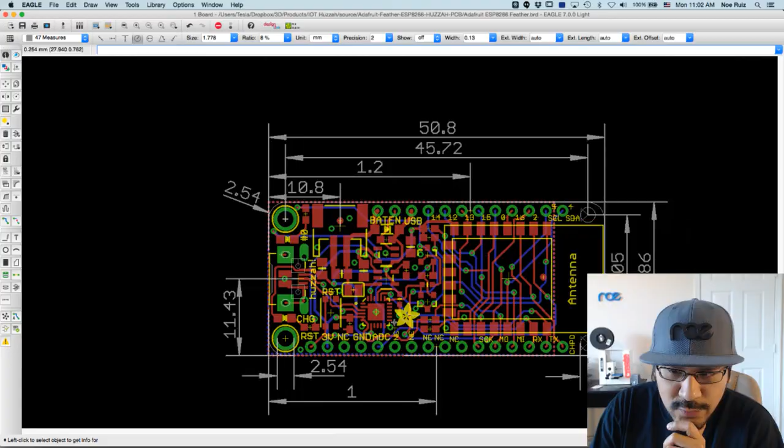What I did do is just change the dimensions from inches to millimeters. You can do that by clicking on a dimension, using the properties info tool, and then changing the unit from inches to millimeters. That's basically all I did, and I added maybe one or two things, like the radius for the fillet on the edges of the board. Everything else was nicely done for me, so that's awesome.

What I went ahead and did this morning was design the board in Fusion 360, so just a simple layout for the board, the battery, and the switch. I want to bring all those things together into one file, so I'll make a new design here. Let's call it the enclosure - this will be HUZZAH enclosure. I can spell it right.

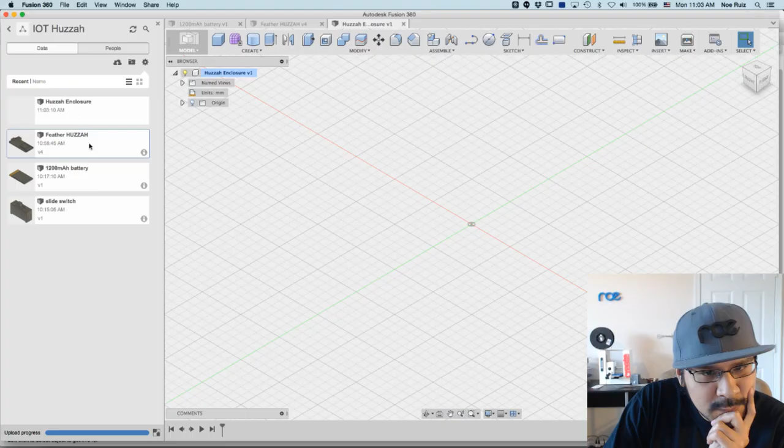Then I'll import everything in. Wait for that to finish saving in the sidebar here, in the little data panel. This is going to be an Internet of Things project that Tony came up with, and we'll talk more about what it actually does in the coming weeks or days, I think.

So let's go ahead and insert it by right-clicking and insert into current design, and that'll insert it there. I'll just hit OK for now, and then I'll bring in the battery.

And then the switch. Let's move this up a little bit, since I want standoffs on the bottom, I'm just going to move it up. Something like that. And then the switch - always important to have a switch.

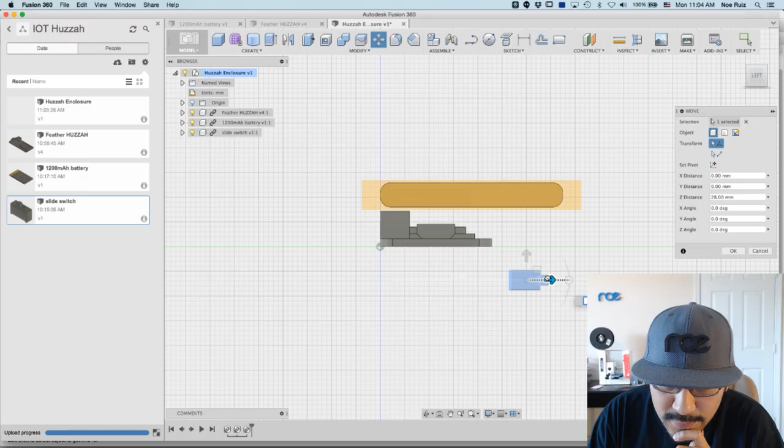I will probably put it somewhere over here, I'll orient it in the right way. Probably, clicking on the wrong thing. Probably this way, and out over here. Something like that, we're just kind of pulling it in here and there.

It looks like I have a construction line turned on, so I want to turn that off because it's kind of in my way. Notice when you import stuff, it says you can't change the visibility of it, so you actually have to go into the component and turn it off from there. Which is kind of a pain - I honestly wish you could just do it from within there, but I don't know, there's reasons. I'll just turn it off.

Hit save on that, and then when I go back, it's going to give me an error and say this component is out of date. So what I do here is right-click and say get all latest, and this will just refresh all the components to make sure everything's up to date.

So there it is. Okay, since the biggest thing is the battery, I'm going to try to make it in the middle of the feather board. So I'll just click on this and move it using the move tool, and just kind of move it here. I think that's fine, and I'll probably push it back a bit since the USB port is over there.

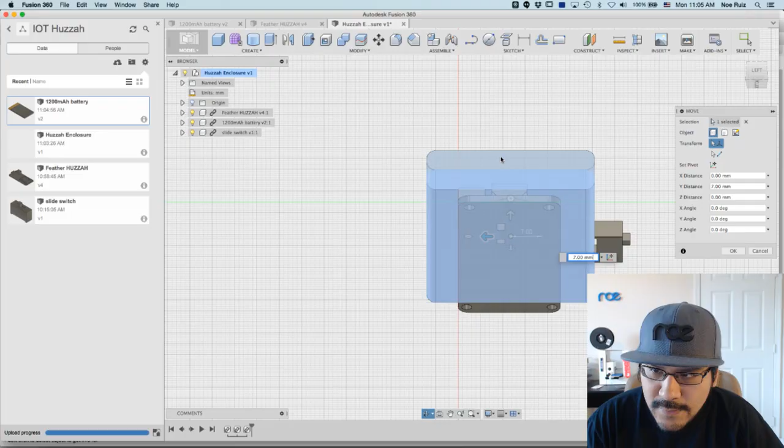I want to have it close to the edge so that I can have a hole for the USB port.

Okay, now I got to mess with the slide switch to find a good spot for it. I'm thinking let's just make it more on the edge over here. Let me go home, top, rotate. Okay, something like over here, I think that's a good spot. Let's see if I can move it up.

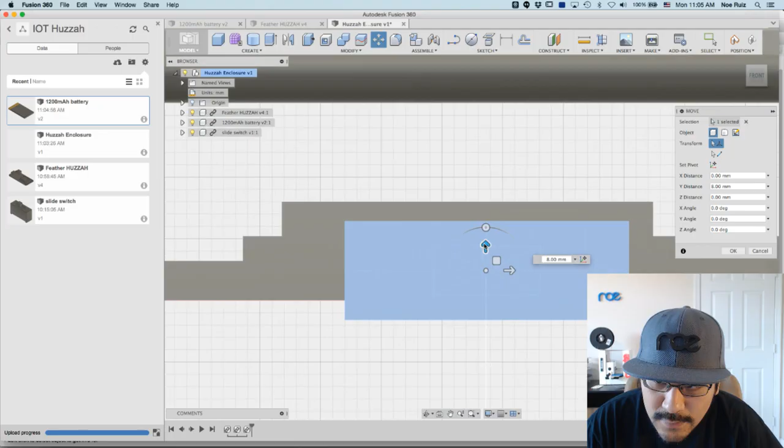See if I can get it straight on there. Sometimes you gotta zoom in more to get by 0.10 of a millimeter when you're dragging stuff.

Okay, looks okay. What I'll do now is just capture position, which saves the state, the position of all the components. Then I'll do a quick save here, say added components, and I'll start drawing out a box for the enclosure.

Yep, just making sure my screen is active.

So what I'll do next is draw the sketch out using the rectangle tool, on this flat plane here on the bottom. I'm not going to add any dimensions, just figure out a rough estimate of the shape.

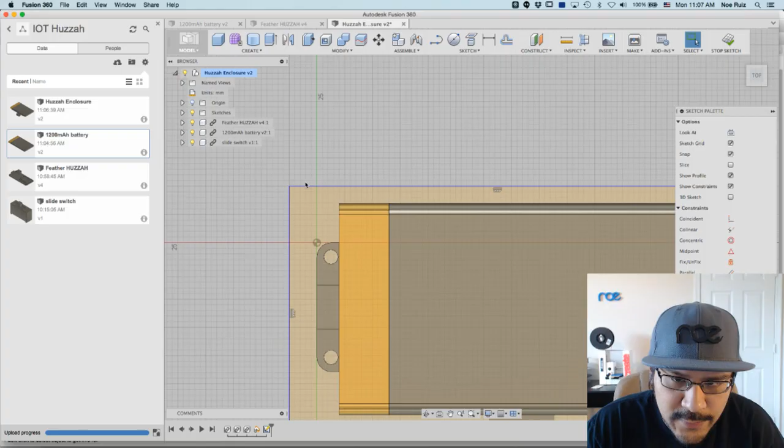So I'll just click, and you'll see if you don't tab or hit enter, you'll have some degrees of freedom. So when I move this around, I can move it without any dimensions being in the way, or restraining it, constraining it.

Okay, that's looking okay. Hit stop, and I'll start to extrude this guy. Since it's flat on there, I'll have to extrude down and up. I'll hit E on my keyboard to get the extrude command, and change the direction to two-sided so I can extrude it from this side and this side.

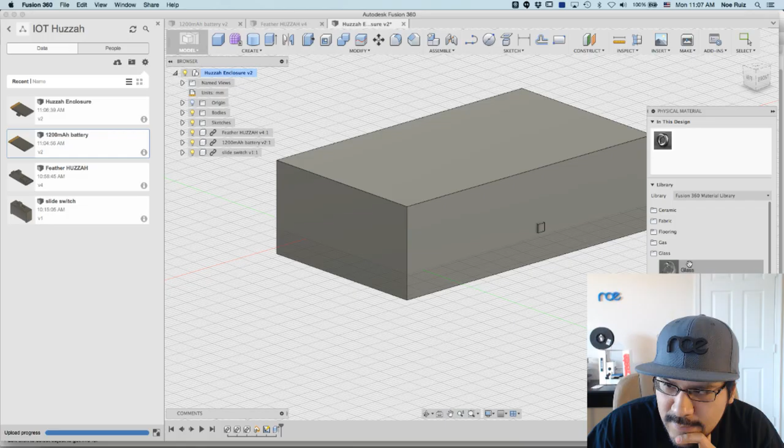Since I can modify everything, I'm just going to hit OK, because I can always double click and modify that later. I'm going to change the appearance so I can see through it. To do that, I'll right click anywhere in the canvas, click physical material, click on glass, and drag and drop glass onto there so I can see through it. I'll hit close.

Okie dokie. So what I want to do is, now I can't see through it. Let me see if I can. I want to be able to see through it while I modify this setting here. Maybe I can bring back... no, I don't think I can bring back the appearance thing. Alright, well.

I know I gotta come up a little bit more this way, because I don't need to be that thick. And I'll go ahead and add some fillets to the edges here.

A better way to do it would be to hit cancel, fillet, the hotkey is F, and I'll just drag a marquee so I can select all 4 of them. I'll do something like 3, maybe 4. Yeah, that's fine. Then I'll do some here. Oops, I'll do another fillet for the top and bottom, maybe 2. Okay.

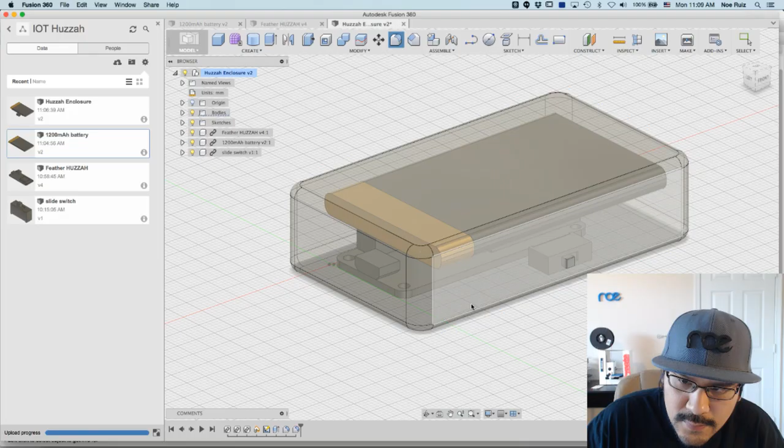So now we can start modifying the sketch here, the case, to bring it closer, because we don't need it to be so big. So I'm going to try to make it as short as possible, or as close as possible.

And when you click and drag like this, you can modify it that way, but unfortunately it's not snapping. So to get it to snap, you go into edit mode, just double click on the sketch, and then you can move it in a bit more.

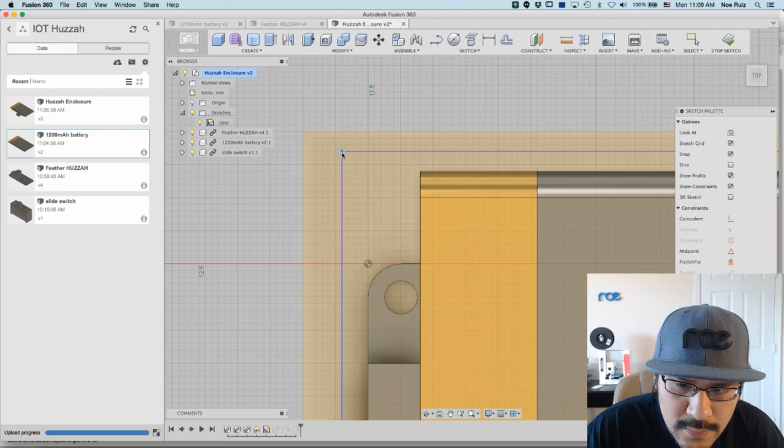Maybe over here, and then over here a bit.

And what I'm not accounting for yet is the thickness of the actual enclosure. So what I'll do now is cut it in half and then create a shell on both sides, so I can get a better idea of the thickness, to accommodate for the thickness of the enclosure.

So to do that, I'll need to get the middle. I need to make a construction plane to get in the middle of this, because I want to cut it exactly in half. So there's a tool called midplane, and when you select 2 surfaces, it'll figure out what the middle plane of that is and create a construction plane.

So I'll click on the top here and the bottom, and it makes it there. So I can use this as a reference to cut stuff.

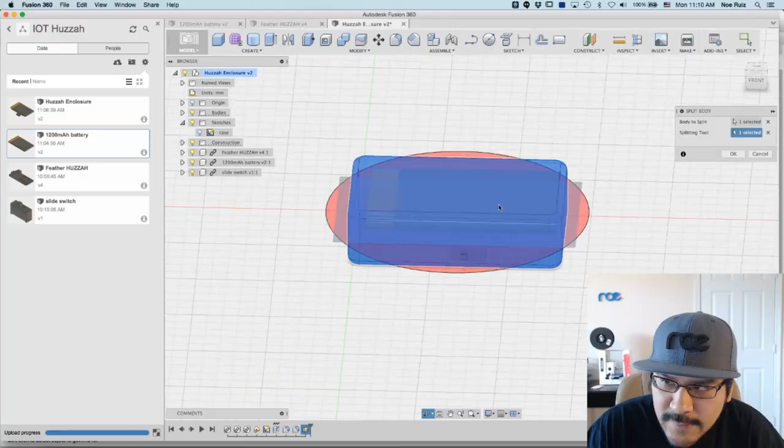So to cut stuff, I can use the split body function under modify. I'll click on that, then switch from body to split to the splitting tool, and click on that mid plane that we made. It gives you a little example of it, and it just cuts the body, not all the components. So hit OK.

Alright, so that's split, and if I go to the bodies, you see I have two bodies now. This one's bottom, this one's top.

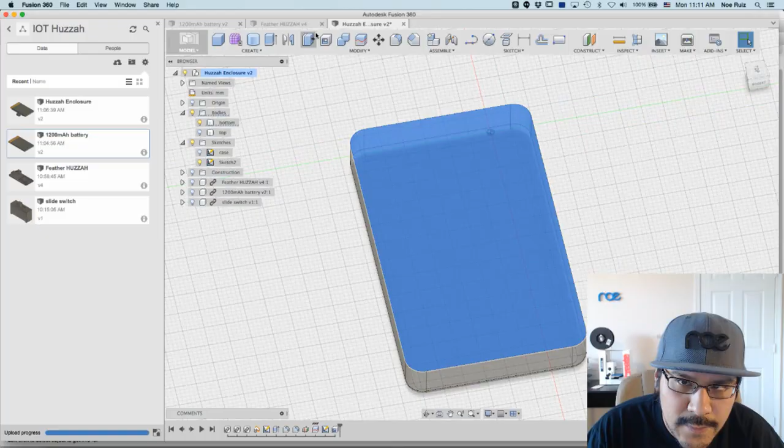Or not a sketch, I'll make a shell. I'll click on the shell button and set it to 1.4 millimeters, and I'll do the same thing for this guy here. Shell 1.4, hit OK.

Alright, so now we have two shelled enclosure things, cases. Now I'm going to bring back the components just by shift selecting them in the browser and then showing them. Let's take a look and see if anything is intersecting with it. I think it's pretty fine.

To get a better look inside, we can do a cross section. Under inspect, there's a tool called section analysis. You just click on a surface, and then you can drag the manipulator around to get a cross section of the whole assembly. So you can see I don't have anything too bad, nothing that looks like it's intersecting.

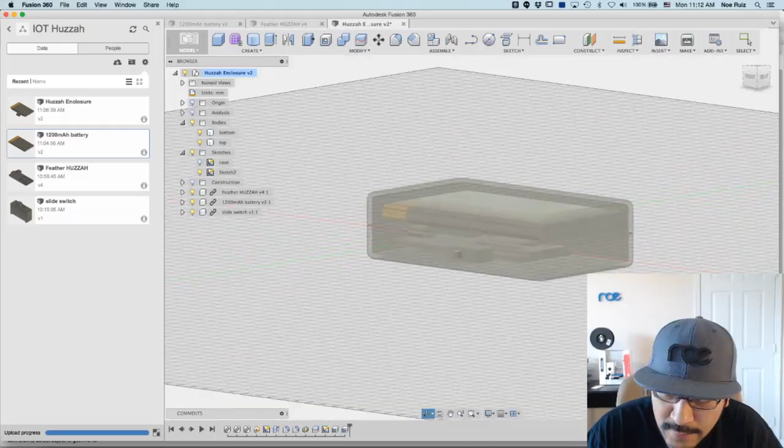So to do that, I'll do another mid construction plane. I'll go to mid plane, click on that guy and that one, and it's giving me a warning saying hey, you need to turn on your folder because you hid it. So there you go.

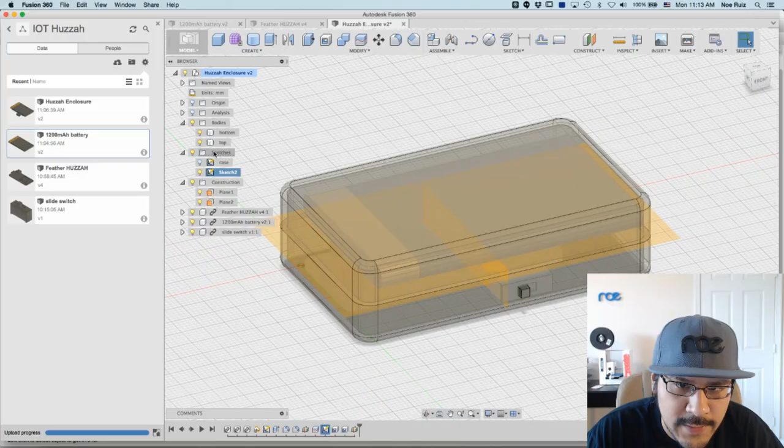So let's say I wanted to get the slide switch right in the middle, I can reference that now. So let me hide a couple things. I'll hide the sketch here. Wait, no, what sketch is this? Oh, this is some new sketch that was made for some reason, like when I was clicking around. Delete that, I don't need it. And this plane, I can hide that.

What I'll do is click on the slide switch, hit the move tool, and then try to line it up as best as I can here. See if I can get closer. Maybe 3.5. Yeah, looks pretty good. Alright.

Pretty close. Now what I want to do is I kind of want to have this recessed inside, so again I'll move it inwards. Click on slide switch, hit move, bring it in. I want to have it protrude just a teeny bit. Maybe like that much is fine.

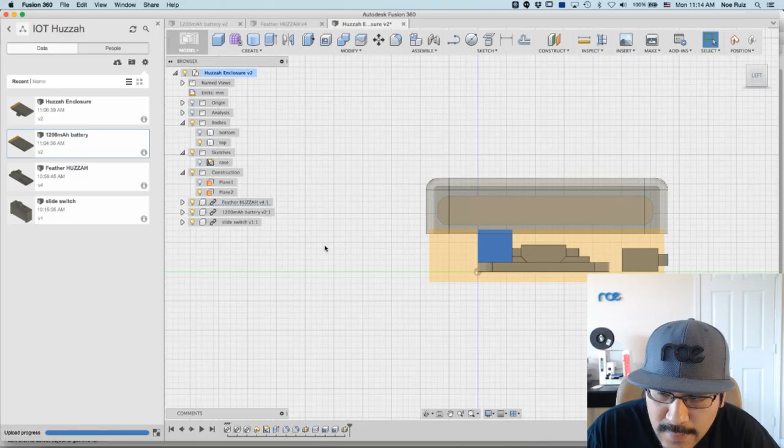Okay, so I got my components just about where I want, and this is important to have. See this big block here? That one, this guy here is the JST port. It's always important to have a little bit of extra room here, because that's where the battery, the JST port for the battery is going to be. So I have enough room for it, I think, and have enough edges. Yeah, I have enough wriggle room and stuff, so I don't want it to be too tight. I think it's pretty good.

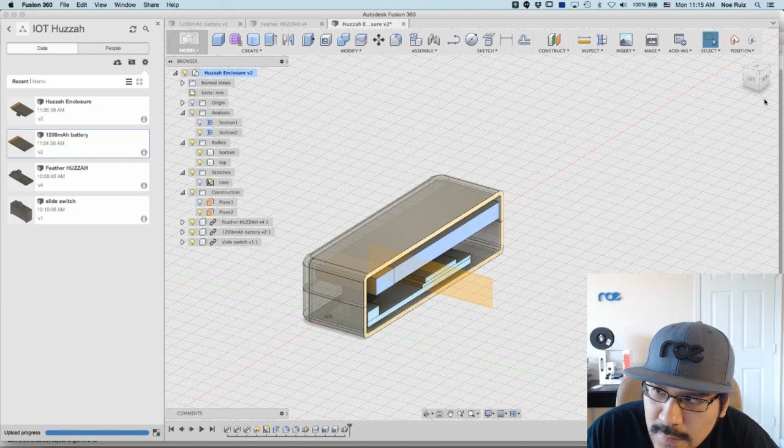Now let's take a look at another section. Let's make a new one over here. Yeah, that looks good. I want to see how close I am on the USB port. Looks pretty good. I don't want it to be right up against it, because then I'll run into some issues when I make these standoffs.

But yeah, I think it's good. I'm not sure what the distance is from here to there. I think it's like 2 or so, we'll see in a minute. Okay, and then I'll turn this off. Let's do a quick save. Need case.

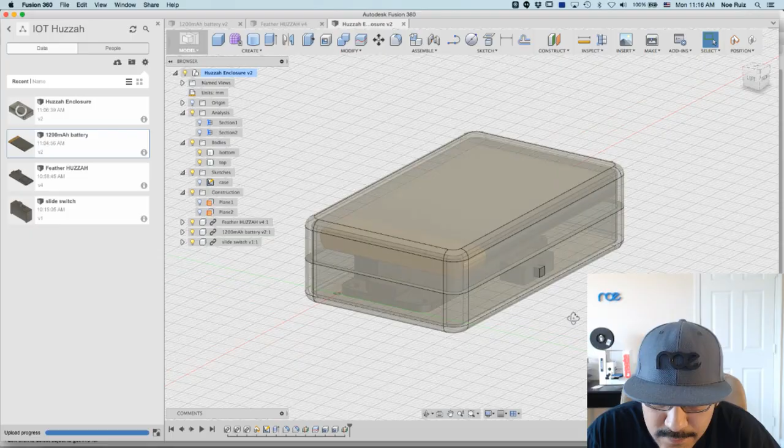Now the next thing I want to do is I can probably start making some standoffs for this guy. I don't want to use any screws in this, so I'm just going to make standoffs with pegs. To do that I will hide these guys here, and then let me capture position real quick. Okay, so capture the position right there, and I'm going to make a sketch on top of this surface here, on the bottom of the feather, so I can make those standoffs.

What I'll do is click on the circle tool, click on that guy, it'll project it for me, and when I hover in the center of a circle, it'll give me a little circle saying that's the center. So I'll make a 6mm standoff there, and here as well. Just hit C to get the circle tool, 6, enter, and I'll do the same for these two.

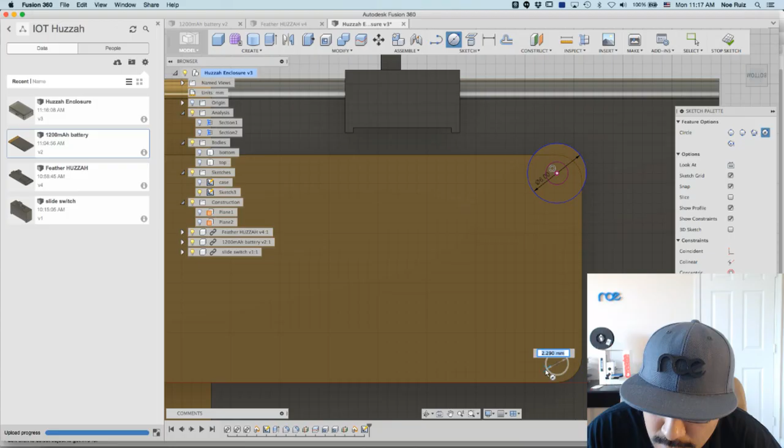Now I'll have to see how it cuts that right there. When I hover over, if I try to extrude, I'll have to extrude both of these guys. To avoid that, I can just select these guys here, and then hit X to make it a construction plane.

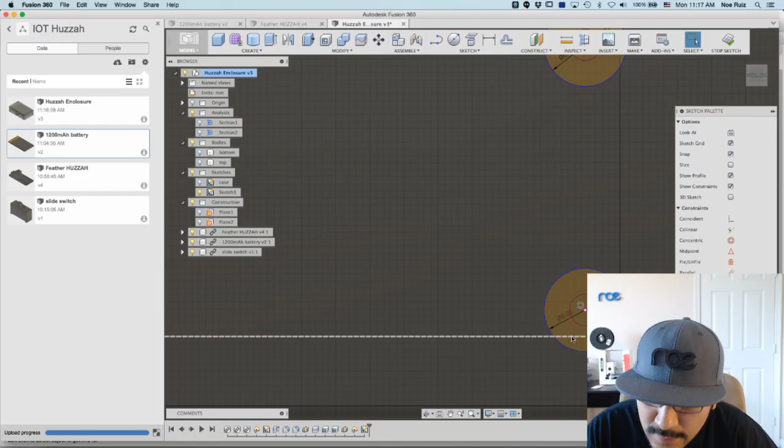These guys over here too. So now when I make it a construction plane, it's still there, but it's not intersecting my lines here, intersecting my sketches, my circle sketches, and probably over here too. They're dotted lines to give you the indicator that, hey, this is a construction line.

Okay, cool. And these are already here, so I can select these guys to be like the pegs and stuff. What I'll do here is actually offset it a bit so that they're not exactly the same size, and I'll just put like -0.1, and then I'll make a construction plane too, so that I don't have to worry about zooming in all the way and selecting it.

So I'll do the same thing, offset here. I like how the offset remembers the last value, so I don't have to put it in all the time. I think it's O on my keyboard. O.

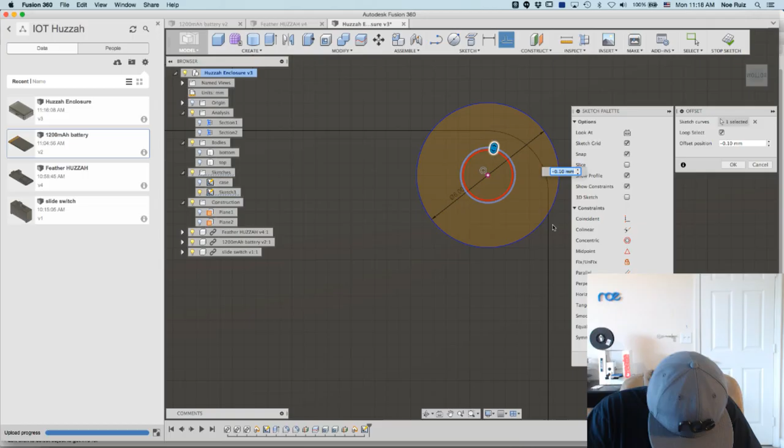Click on that. X. That's up closer, click on that. And then X. Alright, I think that's all good.

Yep, it's looking good. Okay, I'll hit stop sketch now, and I will rename the sketch to Feather Standoffs, so I know later. I'll go ahead and select these. Is it eight things? Okay. And then I'll start extruding them downwards.

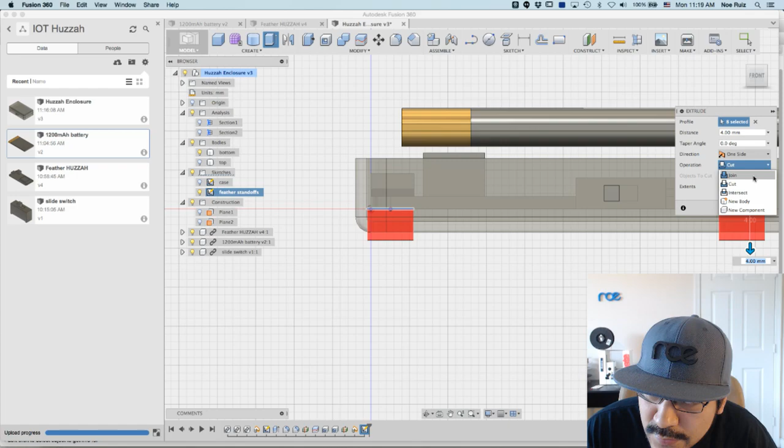And then I'll bring back the bottom case, and change the operation to join. What I'll do is, let me hide the battery so I can look inside the case. Now if I click extents and go to dynamic, and click on the bottom surface of the case like that, it'll just go to it, and that's great because then if I ever update the thickness or height of the enclosure, it'll remember to update that.

And now what I can do is, now that I have standoffs, I need to extrude those pegs up a bit. So I'll hide the feather for a second, bring back the sketch, hit E on my keyboard, and extrude these guys out. I'll probably make it like 2mm, so it's just a little bit over the 1.6 thickness of the board.

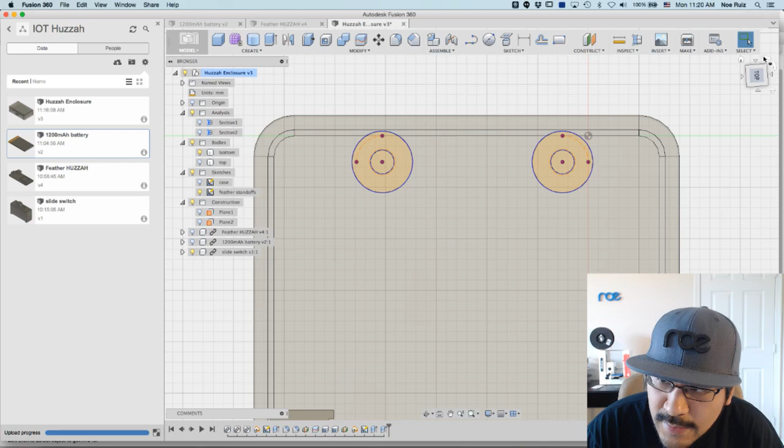Okay, cool. And again, they're offset a little bit from the mounting hole, so that if there's any expansion of the PLA when it's printing, it'll match up nicely. So I can hide that now.

What I'm noticing here is the clearance for the edge of the board here to the edge of the slide switch.

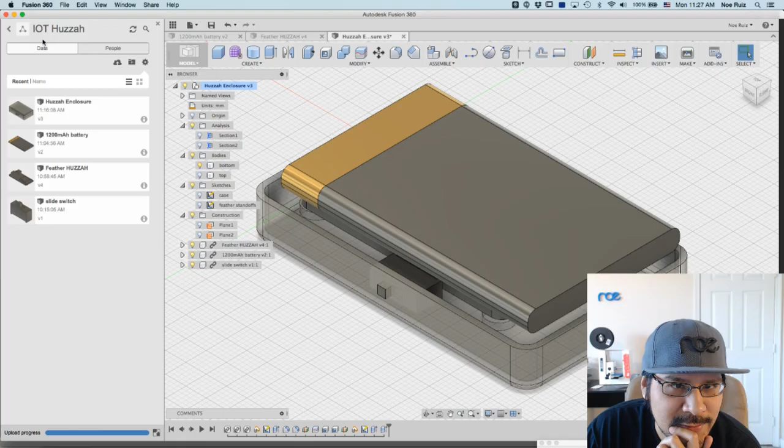The last thing we did was we made some standoffs for the Feather board. And I guess we can continue on now.

It's pretty low to the ground, it's like low riding. But, you know, there really aren't any components on the bottom. It's nice and flat, so I think the distance is fine. It's just a teeny bit, so it'll be nice and thin, if anything.

So, okay, let's move on to making a hole for the USB port. To do that, I'm just going to project a sketch over here on that guy. So I'll just click on my rectangle tool and just click on that edge there. And then I'll probably just draw a line here, a little.

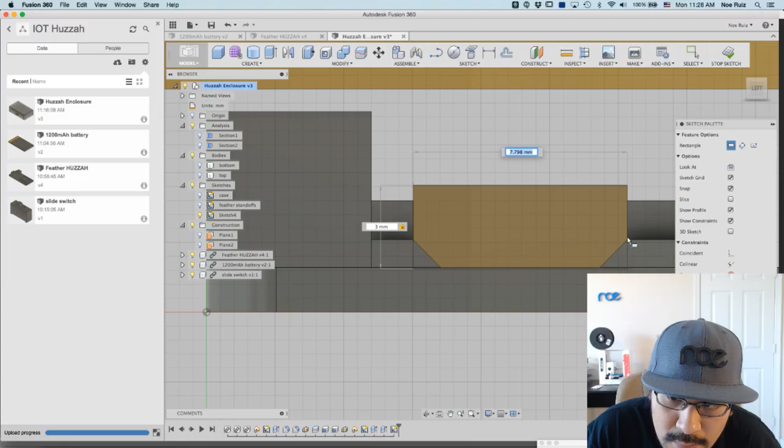What's the, I think 3? Yeah. 3 or 2.8? 2.8. Oh, 2.9. 3. Wow.

Let me close that out. What I'm trying to do is just get a standard rectangle. And for whatever reason it was not matching up, but now it is. Okay.

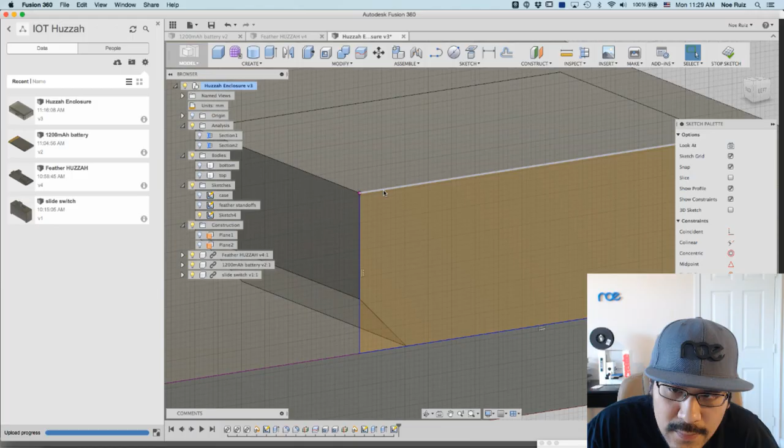Cool. And then I can do an offset here, which will be, oh wow, it's not selecting that up there. I'm having a little problem here. That's fine. When I made the thing, I must have gotten confused or something. So if I try to do an offset, you'll see it doesn't make a complete loop, even though the loop select is on. I've had this happen maybe once or twice, and I forget how I alleviated it. So I'm going to just try it again.

If I offset this guy, it'll have that bottom corner here, because that's how the USB port is. But maybe that's fine, I'll do 0.5. Hit stop sketch, and then I'll use this to cut a hole through the bottom.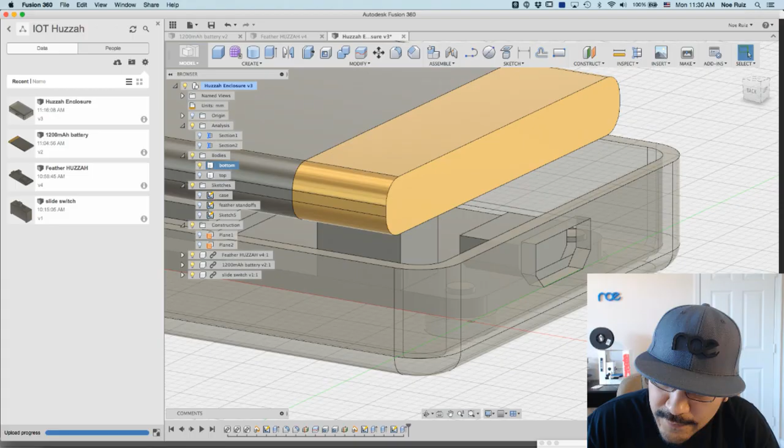So let's go ahead and select these two. Hit extrude and just pull it out. Bring back the bottom, and I'll change the distance from distance to 2, the extents. I'll hit OK, so that way if I ever increase it, yeah, I think that'll be fine.

Cool. Okay, now I need a hole for the switch, the slide switch. And to do that, it's pretty much the same thing. So I'll hide this here, and what I'm going to do is make 2 projections here. So I'm going to project that.

I think that's already been projected for me, this line here, but if not, I'll select it here like that. Okay, so what I'll do, let me go back in. Let me start naming these guys real quick. This is USB cut, this is switch cut.

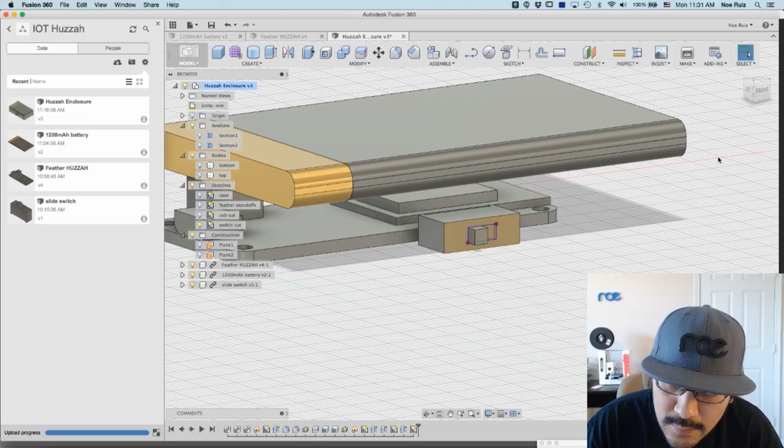Okay, I want to make an offset here. So I'll go into edit mode, click on the offset button, offset it by 0.2 on the outside, and this one, this is the same thing.

It's doing it again, why? Now let me click this way. No, I can't delete it. Okay, let me try to draw that again. Being all weird now. That's super weird.

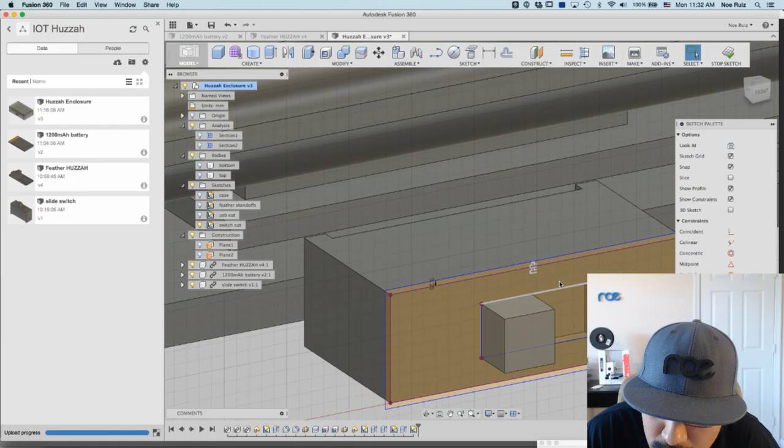We're just going to leave it, and then I'll create an offset after the fact. It's a mucky way to do it, but oh well.

And what I like to do though is probably make another offset here for a little guard thing. I'll show you what I mean here in a minute. What it'll do is it'll just be like a little holder for the slide switch. It's not just the edge of the case that's holding it in place, it'll actually be this little thing here. So I'll put 1.2, because that's the thickness I want it to be, with the 0.2 being that 0.2 offset that we had. So okay, that's working.

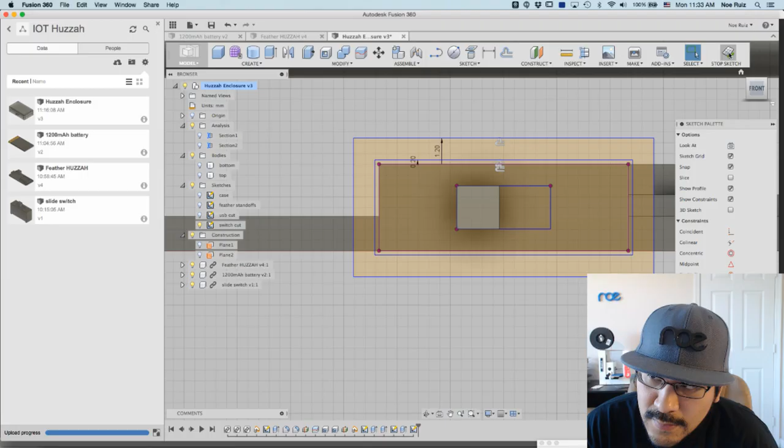Let's stop now. And then the hole's just going to be this here, so we'll only access that little switch and not the whole body of the switch. So I'll bring back this guy here. Extrude that piece out.

Let's change the extents to this guy here. Okay, so you can see there that now you only have access to that, but I need to make an offset here so that you can have a little bit of room to get your finger in there. So I'll just have to make another sketch here. So let's do that. I'll draw it on the surface of this guy instead though, and now I should be able to do an offset here.

Maybe. I think 0.4 looks good. Okay, stop, and then I'll cut back inwards.

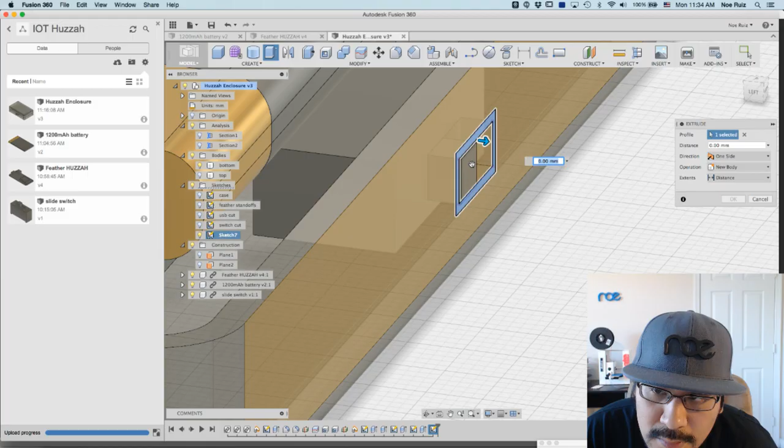And then I'll get some of the components out of the way, get out of my way. There you go. Change the extents from distance to 2 again, and click on that this time. Hit OK. So, you know, that's one workaround. What I don't like about it, you know, it made a new sketch, but whatever. Switch cut 2.

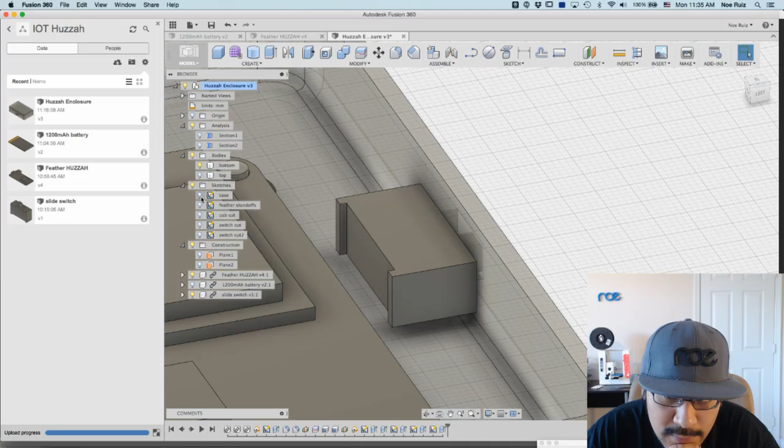Sometimes you just got to keep working with it. And what I want to do is make that holder to hold this guy in place, because right now it's just like floating. And it's a little bit of overhang, but it actually performs pretty well. I've printed this type of feature many times, so I know it works well with all sorts of printers, mainly ones with an active cooling fan, but yeah, all of them do these days.

So let's bring back this guy, just select that edge piece, and then bring it out like that. And 4, I think, is a good number here. Hit OK.

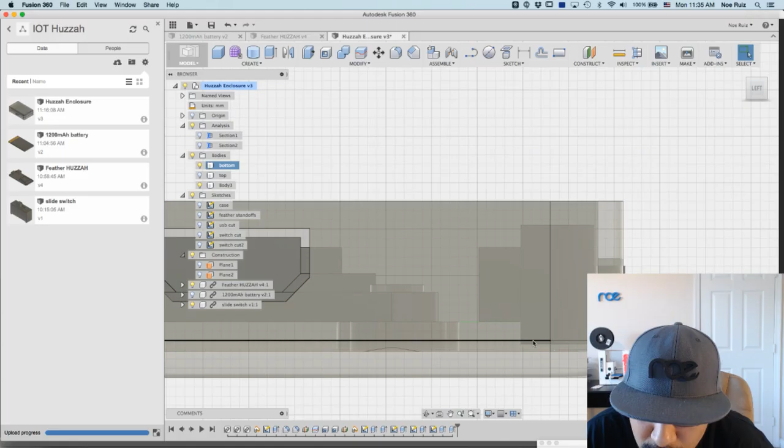And what you'll notice is that I have this little room here. So what I should do is start moving the switch down a bit. So that's what I'm going to do. I'm going to go back in time in my timeline and move it down a bit, probably by 0.5, or half a millimeter. So to do that, I'll go back here.

Actually, I don't have to do that. I can just double click on that, hit modify, and then click on the switch, and just move it down by I think 0.5. I think that should do it. Hit OK. Hit finish capture, and you can see here.

It should have merged it. So I'll double click on this extrude and click on join, because it's a new body right now. So when I hit join, it'll know to stop it here, to stop it. Now it's flat on the edge, and that's looking pretty good.

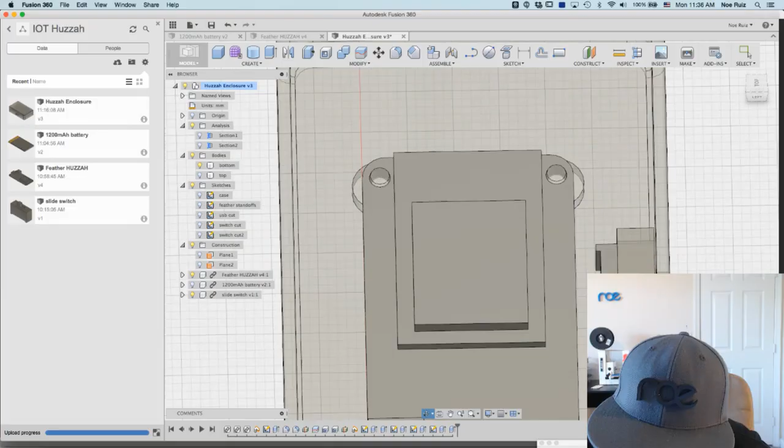Now the yeah, it's gonna be pretty close, the slide switch. I think that's fine. Okay, I'm gonna do that. Yeah, you see that right there? Looks like there's a problem. There's a gap, so it's not actually touching that.

So let's go back to that extrude and see what's going on here. So it looks like I need to put two-sided on and then just pull this out over here. Hit OK. Okay, so now there's no gap. Okay, cool.

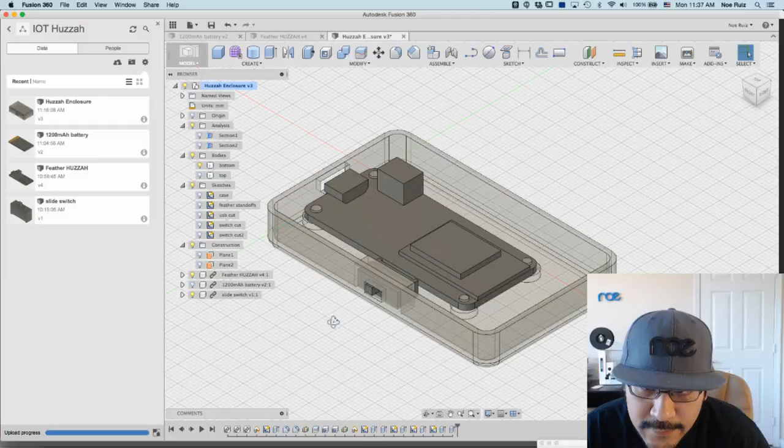All right, and you can see why, because there's a little bit of clearance there, which is fine. All right, I'm happy with that. Again, I know there's an overhang, but it actually performs pretty well on most printers with an active cooling fan. I think that's gonna be it.

Oh yeah, I need a hole for wires, so let's bring back everything. Just get a last glance of here. Oh, and of course I need to make like a lip thing so this connects together. Hopefully there's enough room. I'll make the lip probably on the bottom here, but I'll go over that after I make the cut.

Let's make the wire like right there. So let's figure out where the center is. I'll just make some lines here. So I just made some lines using the line tool, and I'm going to turn these into construction lines so that I know where my center point of this whole sketch is.

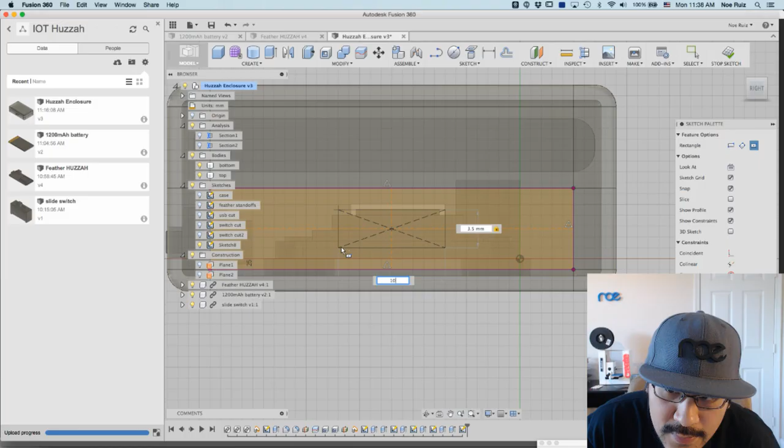And I'll use the rectangle tool, R, and then I'll change the rectangle type to center rectangle so I can click in the center and bring that out. That looks fine. 3.5 by 10. Yeah, okay. Let's make it 4. Yeah.

Actually, what I want to do is make it so that since this is 2 pieces, if I leave this like that, you actually have to thread the wires through, and then you won't be able to pull them out again unless you unsolder them, which could be a problem. So what I'll do is I'll need to sort of redraw it a little bit.

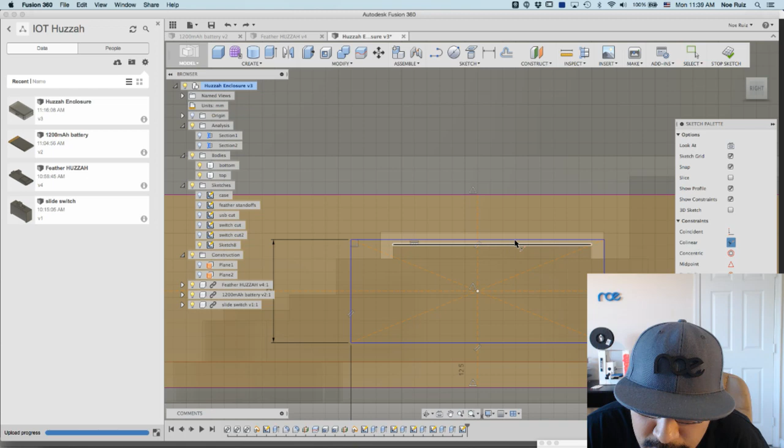Here, let's just do this. Let's go back into the edit of that sketch. Now I can't move it because it's in the center here. So if I delete this constraint, I should be able to move it. Yeah, so I can move it now. But what I'll do is I'll just use a collinear constraint, which will say, hey, this guy should go over here. And then that just moves it up there.

So okay, so now I'll use that sketch to cut this bottom piece. So let's hide the top. Oop, the top. Bring back the bottom. Get the battery out of the way, it's always in my way. And then extrude that way. Extents to that. Okay. Alright.

So that's just a little opening for some wires to come out. And the pins are over here along the edge of the board and here. Not sure which pins are going to be, so they're just going to wire out that way. But again, that should make it kind of nice.

And I don't know, I'll put a fillet here on these edges. Why not? 1, maybe 2. Yeah, 2's fine. Okay, that looks kind of cool. Okay. Nice and simple enclosure.

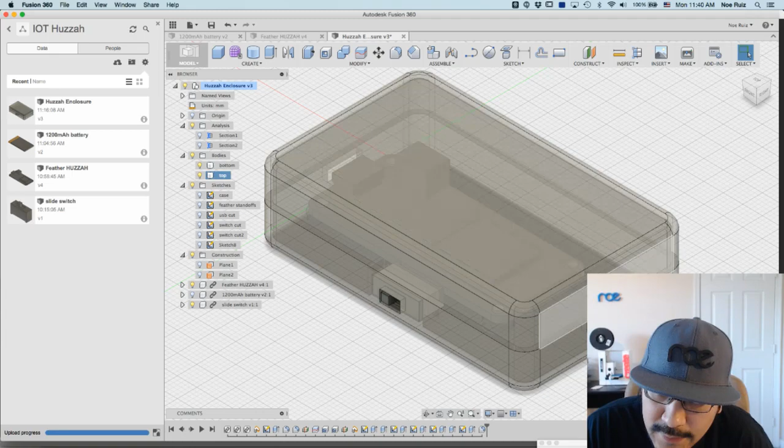I think the last thing I'll do is make that lip, and I'll make it come out of this guy here. So do that. Get rid of the top. We're gonna project this edge's sketch here. So I can click on it and click project, which is under sketch. It's under project include, or P. And then what I'll do is...

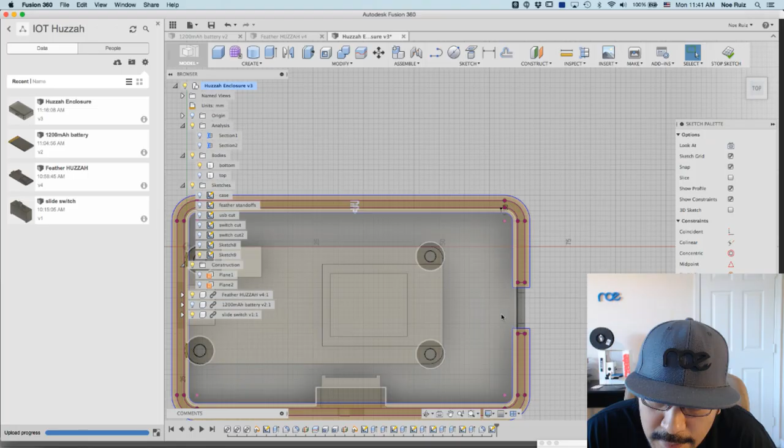I will create an offset. Make it 1, so it's 1 millimeter thick, and I'll hit OK. What I need to do is close this off, because if I extrude this, it's obviously going to extrude on the outside of the case, which isn't what we want. So I'll have to close them up using the line tool, which is fine.

So I'll just come in here with the line tool, then close these off. I think that's the only part I need to do. So hit stop sketch, hit E on my keyboard, extrude, and then I'll change the direction to 2 because I want it to go on 2 sides, and I'll probably make it 2 millimeters. Let me change it to symmetric, and then I'll change the operation to join.

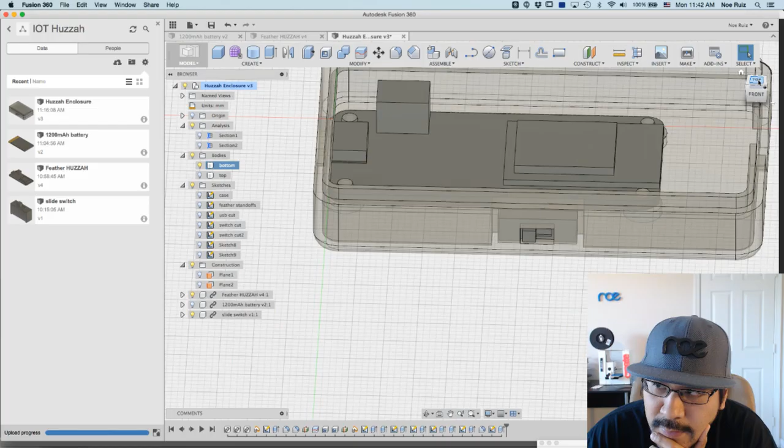Okay, I'll hit OK. There's my lip, and actually what I want to do is create an offset for this guy so that it's not exact, because sometimes it doesn't fit on the other part, so I'll have to modify my sketch again. And I'll add a chamfer to this edge here, because you can see there's an overhang.

Let me turn on the section analysis. You can see there's an overhang. Not that one, maybe this one. Yeah, there's an overhang there. You can see that, and it's starting to cut into the little holder for the slide switch. I think it's fine, but we'll deal with that in a minute.

But for now, let's make that offset. So it's this one. Yeah, what was this? This is going to be wire hole, wire cut. And this one is case lip, case clip, case lip. Alright.

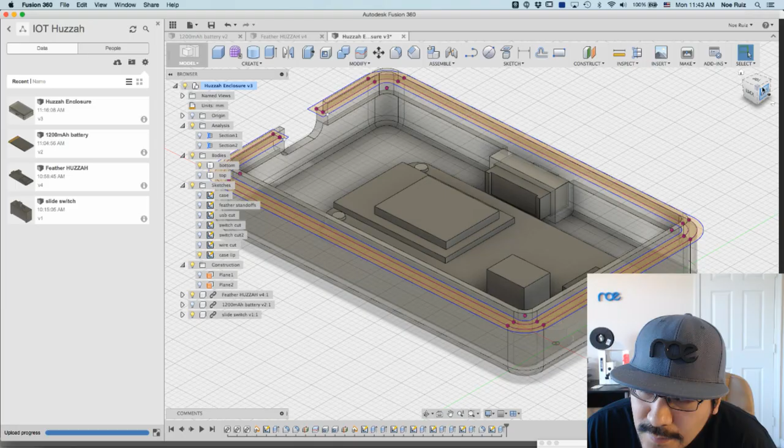So to do the offset, we need to make it in here. So I'll click on offset. I'm not in edit sketch mode, so let me go in there. And I already have an offset, so I'm actually going to put 1.2 to accommodate for that new offset that we're going to do. It'll be over here.

0.2. Okay, so that's going to be our new... well, actually, I'm just going to use this here to cut away from what we already have. I'll show you in a sec what I mean. Oh wow, the extrude here is all messed up, so I have to select the right profile.

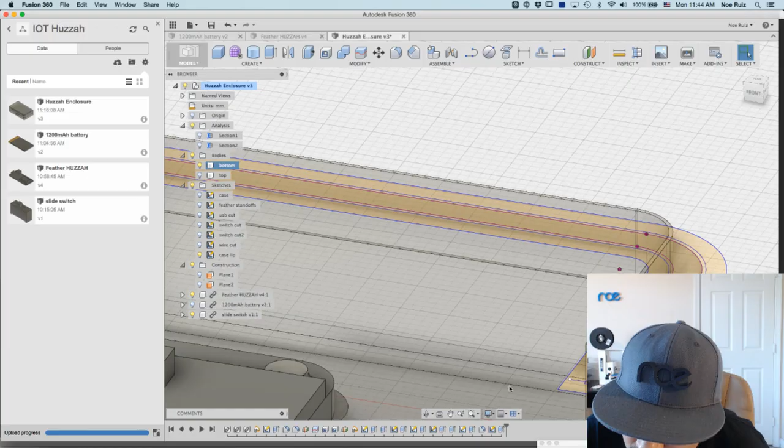Oh, I see, I have to move these guys, those little line cuts that we made to intersect the lip. Okay, let's go back in there, and then just drag this out like that. So now it cuts that.

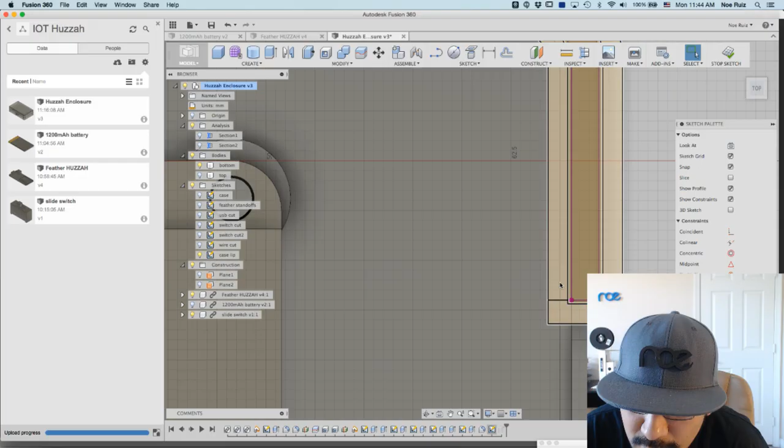I didn't cut it. Let's delete that and then redraw it. For whatever reason, it's not cutting that because it's a new offset. That's why. So I'll delete that and then redraw it. Should be simple enough. It is not cutting it still. Really? Yes. Okay. Well.

What about this one? Maybe that's why it's not cutting it. Yeah, that was why, because it's still like... Okay, cool. Well, that's fine, because there's two of them, you know. So now it'll cut it. Okay, so hit stop.

And then we need to update our extrude because it's just picking what it thinks is best. So let me just deselect all the profiles and then click on that one. And really, is this one messed up too? Oh man, we gotta fix this one too. Is this one fixed? Yeah, it's fixed.

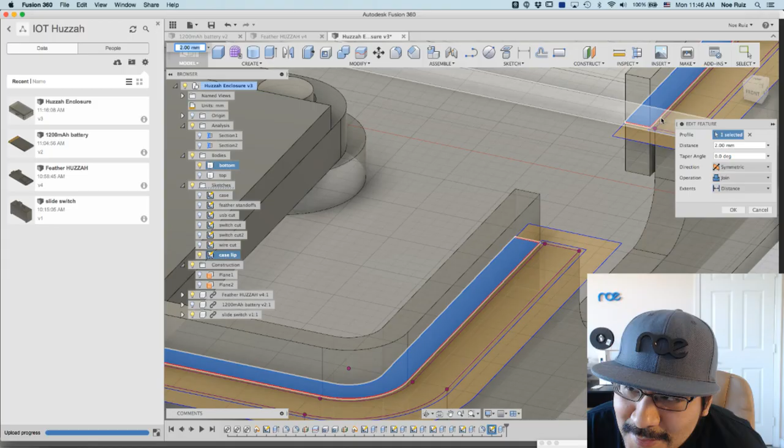Okay, so now we can fix our extrude, kill the profiles, select these two. Oh man. I'm holding down option to kind of get rid of the body for me, and I'll hit OK. And now what I'll do is extrude again, but this time I have to hide it, can't get down there.

It'll just be this little offset here. Bring it back. Where's my... there it is. Let's say distance to the top of this guy. Yep, okay, so now that just created a cutaway 0.2 millimeters off the lip.

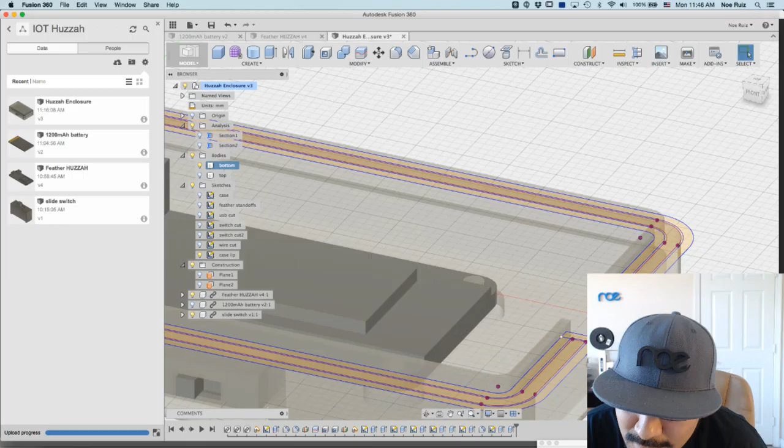And that's very important, because watch when I bring back the top case and put a section analysis on. Maybe this one, it's better. You'll see there's a tiny bit of clearance, and that's very important, because if you don't have that, when you 3D print the case, it's going to be too tight of a fit and it just won't fit. And you can see I have a little bit of... no, that's fine, that's where I wanted the hole to be.

Alright, so let's go ahead and add that chamfer to the bottom here. I have to add it a couple different places. So I'll click on chamfer, click on that edge. I think it needs to be... is 1 fine? I think 1 is fine.

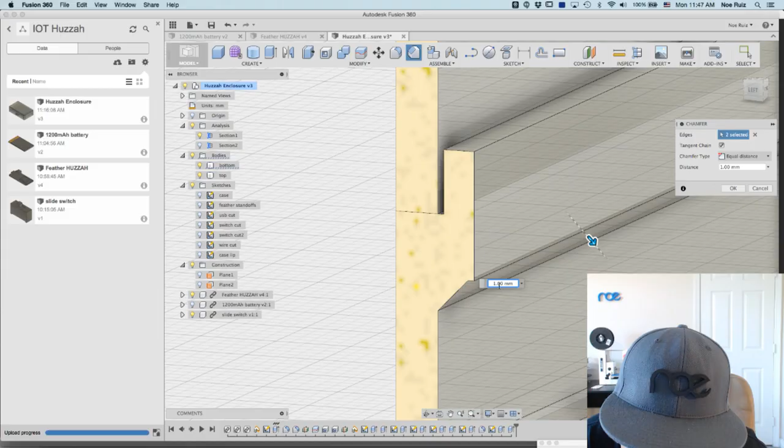I have to click on this one too. It should be 1.2 then. Okay. Let's click over here then. Okay, 1.2. And then select this one as well.

And then let's turn off the section analysis. That should carry all the way through. Let's get rid of the top. Yep, my chamfer is going all the way through. Cool, hit OK. Alright, that way the overhang is dealt with by just printing that chamfer.

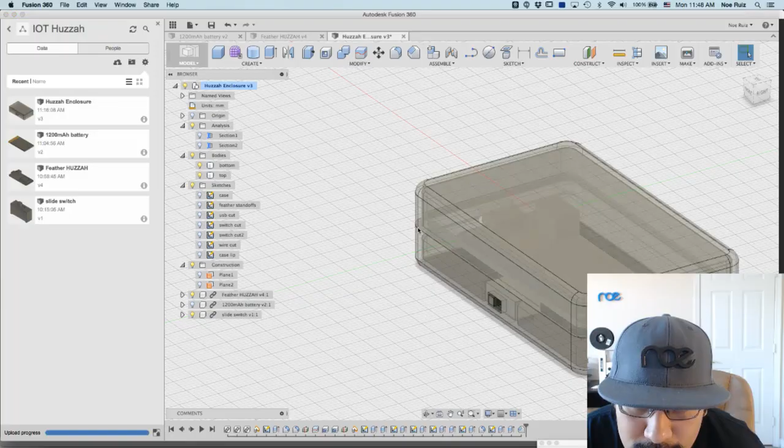Okay, I think that's it. Simple enclosure, a little bit of live streaming problems, but I think that's fine. Things take a minute when they need to be simple, you know. So we added case lip and holes. I forget, we've done a lot, so I don't remember what we did, but those are the main two things.

I'm gonna go ahead and export these and probably print it out on the Printrbot, and then I'll take some questions while I set up the print. So let's go to Printrbot.

Yes, reconnect. My Astrobox went down when the internet went down, at first for everything. It's not restarting now. Now we have a new problem. Let's see how we can fix this one. Usually if I unplug the Wi-Fi dongle from the Pi, it works. So let me see if I can do that.

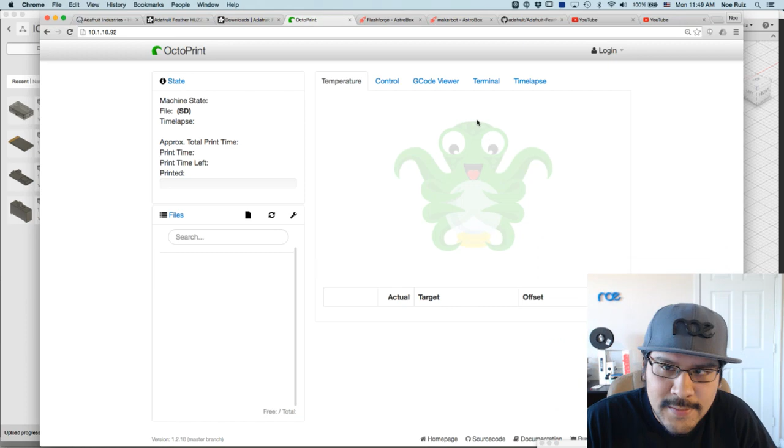Little green light flashing, something's happening. Oh cool, I was going to SSH into it, but nope, it's back. Give it a second here to autoconnect, all that good stuff. Control, there it is. It's taking a minute, I just homed it and nothing happened, so I might need to disconnect and reconnect.

I am receiving stuff, there it goes. It just took a second to kick in. Now let's just go ahead and preheat. It takes a minute, I like to use 220, so that's set. That's going to heat up, and I'll launch Simplify3D, which is my slicer of choice.

And I need to export those STLs, so let's delete that and go back in here. Save as. This is what, the bottom. I have a folder here already set up, I think.

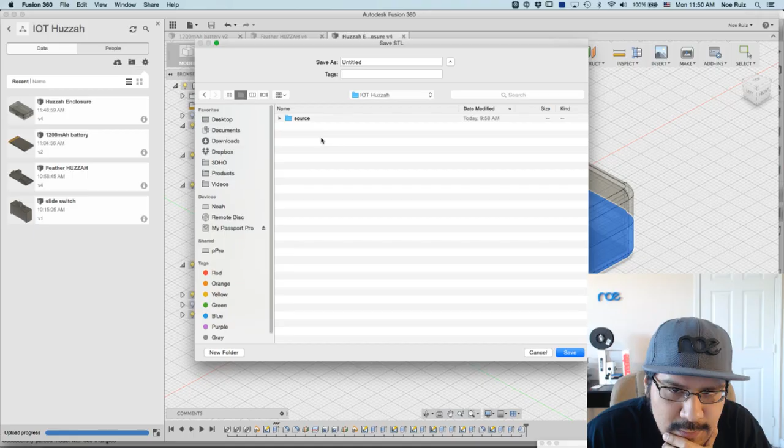IoT HUZZAH, let's call it STLs. This is going to be HUZZAH bottom, case. Case bottom. What's going on? You can't copy and paste? Nope, guess not, alright.

Let's save this one, and just top, and we'll orient them correctly in the slicer. So let's go there, let's add. What should we print first, the top or the bottom? It really doesn't matter. Probably the top.

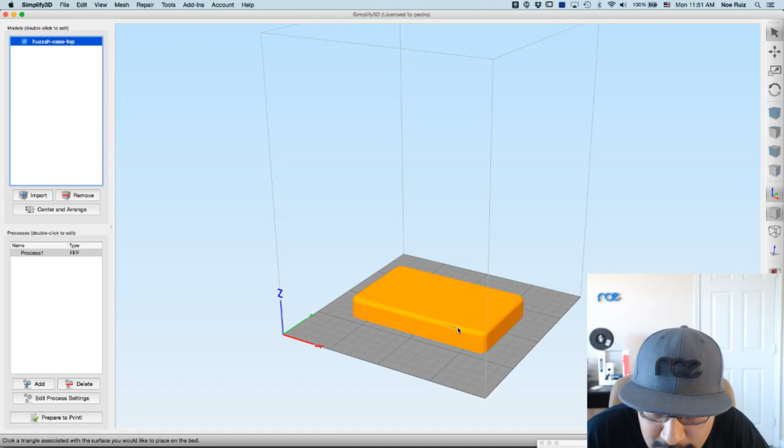And then I'll click Command L, which lets me select any face and it'll flip it to that. There's nothing here, it's just, let's not do that one. Let's do the bottom. Quick look, yeah the bottom. Okay that looks cool, and it fits on the printer bed. Play, good.

Let's take a look at my settings, hopefully everything's fine. Retraction's kind of low, I don't know why that's 0.5, it should be like 1. And why is there a vertical lift? Uh-oh, some of my settings got messed up. That's weird, that's cool, it gives me a chance to sort of go through them all here.

Let's click auto, or actually no, I like it at 0.42. I'll show you why in a second here. Layer, that's fine, I like to have the top 4 and bottom 4. It's all good, additions, there's this little skirt. Infill, I like to use 20, 25 is good infill overlap.

I don't need any supports. What is the last thing I printed on here? That's so strange, 220 is fine. Cooling is fine, and the second layer it turns on the active cooling fan.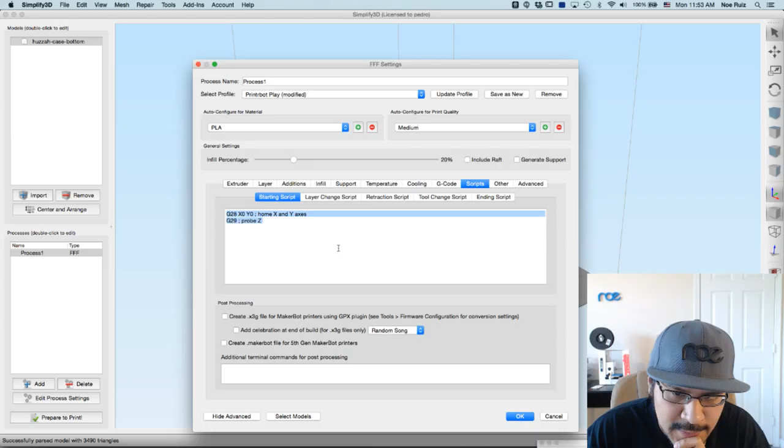I don't have my lovely purge script for starting script. I'm gonna do a video about that soon. Start script, I don't have them here, but it's fine. It'll just, I'll just have to purge before anything.

Okay, the speeds are a little slow. Let's bring that up to 60, and then 90 on the movement for the X and Y, and then I think that's fine for the Z.

The gap, I like to make that 35, sometimes 50, but let's see what it looks like when I generate the Gcode. Let's take a look here. You can see the toolpath for the edge is just three perimeters, which is nice. That's why I put it on 0.42.

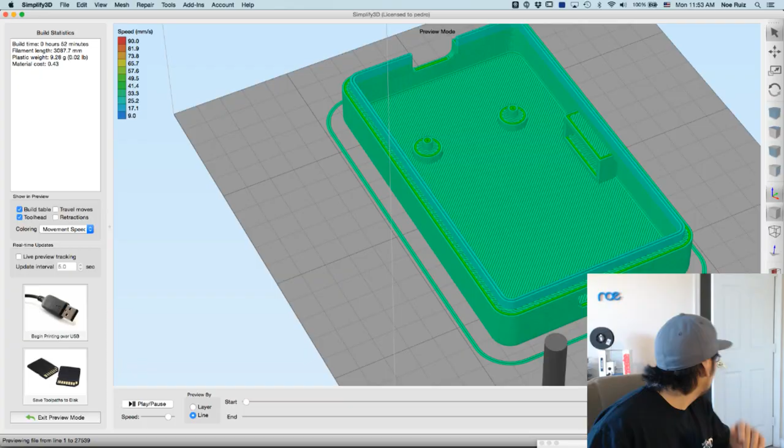What else happened? Yeah, not, you're good. Okay, I'm here for questions. Okay cool, Pedro is joining us here. Some questions lined up here. Ask your questions right now. Ask your questions, since I'm going to kick off the print very soon. Yeah.

I'm going to change the perimeter gap to 50, that's like the highest it can go. It didn't affect it here. What I wanted to do is make this lip a little bit thicker than just 2 perimeters.

It's like hollow. So what I'll do is I'll just change the extrusion width back to manual or auto. Oh man, it's not doing it. I could make it a little bit thicker in the CAD. Debating whether or not I should or not.

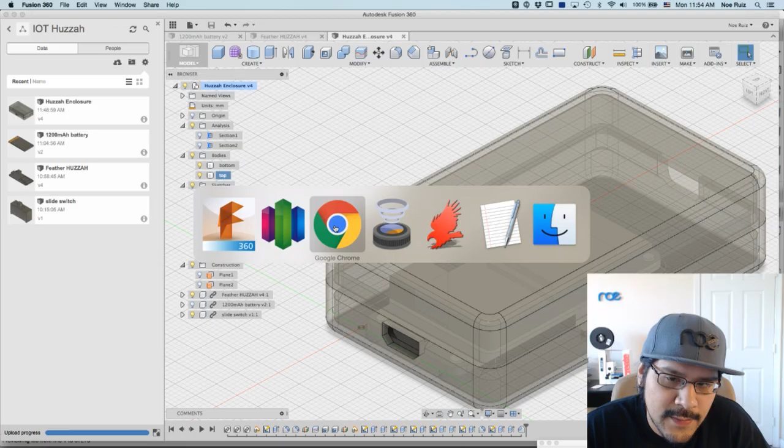Let's give it a try. I mean, we're gonna prototype it anyway, it's just prototype, it's the first time. I'll switch back. A lot of the time is just figuring out how do I get my settings nice, you know. Cool, okay.

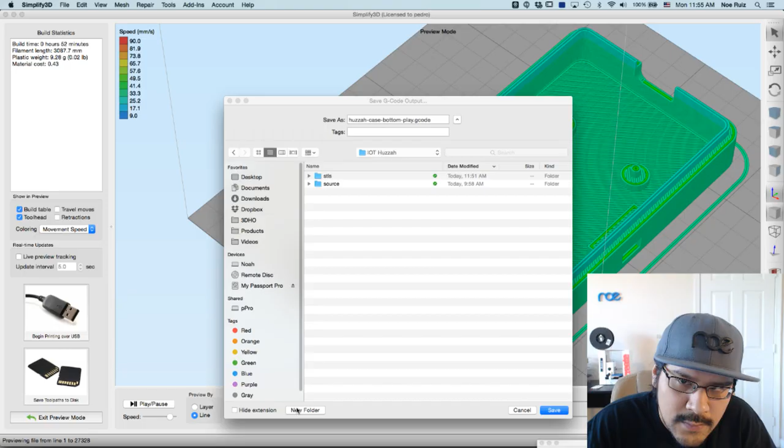We're gonna fire off the print. What we did was just made a simple case for the Adafruit Feather ESP8266, a battery, a 1200 milliamp battery, and a slide switch. It's for a super top secret Internet of Things project that Tony DiCola came up with, and you guys will see that in the coming weeks. It may or may not have to do with April 1st. Isn't that the Apple thing? No, it's when Apple was founded on April 1st, it's an April Fool's thing.

All right, well let's go ahead and kick off this print. Umberto is asking, is there any free version of Fusion 360? Absolutely, we have a special download link we'll put after the stream, but you can just go to Fusion 360, type it in Google, and download it for free. Just sign up for a free account on the Autodesk website and it's free for a year license, then after that you can renew it. There's an educational thing, and they only charge you if you make over $100,000 for commercial purposes. Everything else is educational - like us, we don't commercially sell these designs, so we're allowed to do it for free. It's open source. I'm gonna extrude real quick.

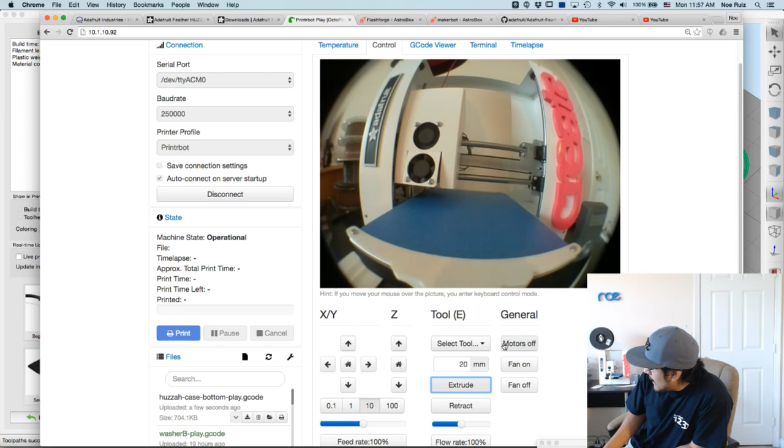Someone's asking what do we think of the new Raspberry Pi? Of course, it's a great thing, it brought the price down for the B Plus, it's like $12 now. It's awesome, we have a lot of projects planned for the Pi 3. It gets hot, but not a lot - only when you have all 3 or 4 cores running at 100%, which I'm not sure why you would do that. Mounting holes are exactly the same. We may have to worry about heat and heat sinking, so not there yet. I haven't done any Raspberry Pi 3 projects yet, but we will soon.

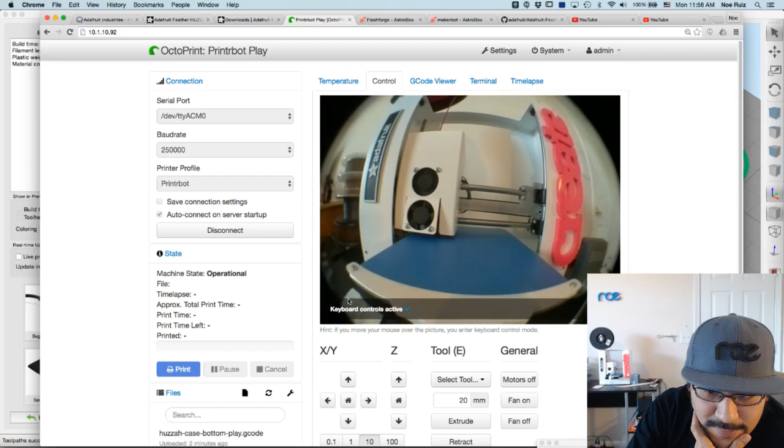Jenny's asking, are we going to add analog sticks to the design? To the Super Pi? No, to the little mini micro. Oh no, I don't think so, I think the DPad is going to be fine. All right, let's kick this print off. It would increase the size of it, wouldn't it? It would increase it in thickness, I think, a little bit more.

Arsenic is asking, how does the Printrbot Play compare to the Duplicator i3? They seem to be in the same price range. I think the Duplicator i3 is definitely a good option - it's got to have a bigger bed. It's kind of like a Rep 2 clone, right? Yeah, it's from Wanhao. A lot of people have been saying it's pretty good, there's so many great reviews on it already. If you had a choice between the two, probably the Duplicator, since it has a bigger bed, and it's heated I believe. Both very good options - one has a bigger bed and has heat, this one does not have a heated bed. This one's only 100 by 100 by 130, so a little bit tall. There's definitely more projects that are going to fit on the i3.

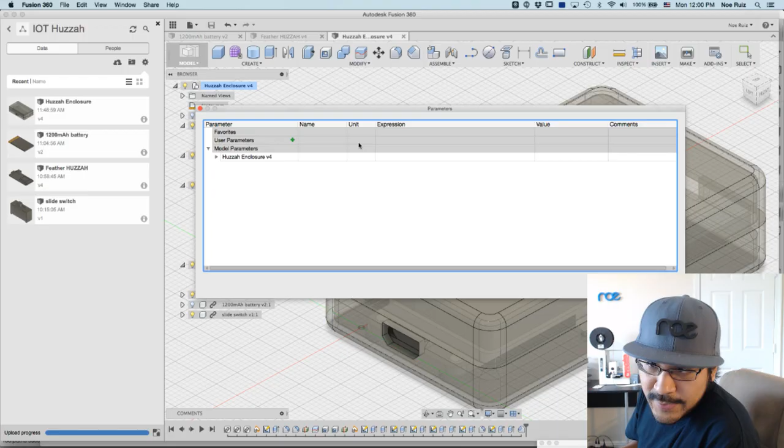Redo is asking, in the process of printing I saw you set parameters, is there any documentation about this? Set parameters, like best practices on how many parameters to use? I still don't understand the question. I think that's what he means - is there any documentation on setting parameters? I didn't really set any parameters, but there's a specific parameter tool inside of Fusion. Change parameters - this allows you to set a value and then a name. So I can say thickness and make it like 0.2, and then whenever I make the shell, I can just type in the word thickness and hit OK. Then whenever I want to change the value of thickness... it's on Fusion.

Go ahead and check out Taylor Stein's video on the Fusion 360 channel on YouTube. I need to use parameters more, because I'm not using them much. That would be a good place to start. I usually just enter things in and change it from there, which is okay. But if you're doing a lot of the same parameter and planning on changing it, then setting a parameter is good.

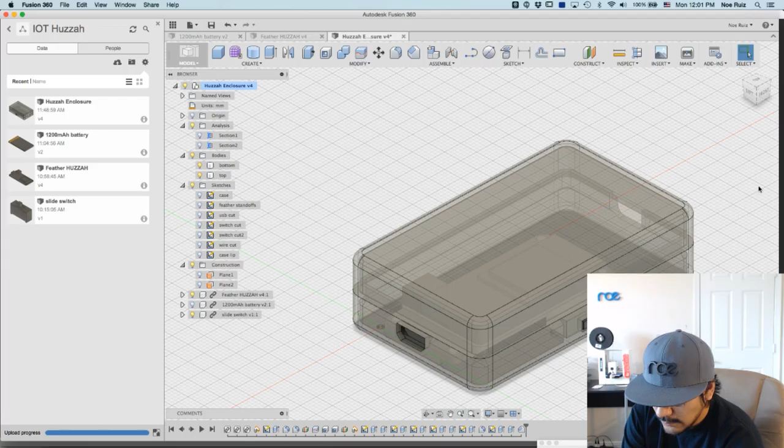Any other questions? How twitchy is the Printrbot Play? Do you find it consistently printing well? It's let's say like 85% always on target. The other day I had to offset it by 0.10, but it's pretty easy to fix.

With the other print, you mean the probe, right? Yeah, the probe, the Z probe. Sometimes something will get knocked off and it gets offset by 0.1 millimeters, but it's easy to change if you're using OctoPrint.

Someone's saying we have audio problems, static. Yeah, that's probably staticky. Oh boy, there's always some problems. Let me turn off the mic and I'll come back in a minute.

Mic test? Okay, it's good. Yeah, sometimes the mic likes to flake out on me.

Let's take a look at the printer here. The light changed. I need to have a dedicated light on the Printrbot. So this print should take, what does it say, 52 minutes? Yeah, it's a little bit slower. I imagine you could go faster on something like the Duplicator i3, probably like 90, 150 or so.

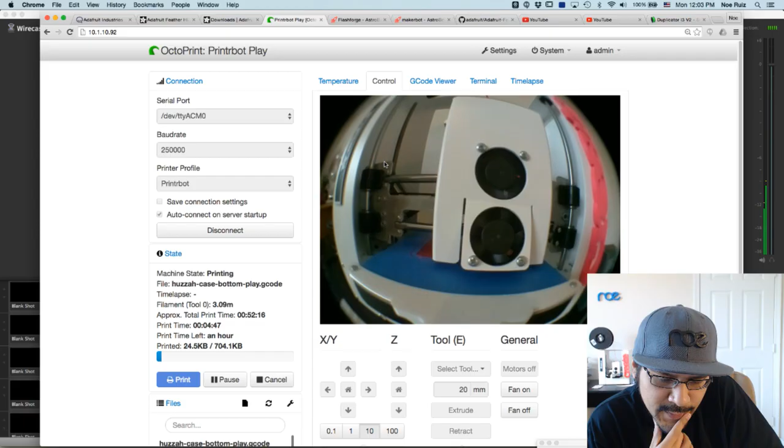Someone's asking about the logo on your hat. Is it 3D printed? Oh yeah, absolutely. This is printed in NinjaFlex, but you can print it in PLA and warp it using hot water. We did a full video on it, so take a look at our YouTube channel playlist, look for custom hat graphics, and they'll give you a whole spiel on it. This was actually Becky's idea, and she made quite a few different ones, and it's sewed on there. But yeah, good example of good use of NinjaFlex.

Now, could you do this in something like Blender? Absolutely, yeah, you could do this in Blender, any CAD app. I just like to use Fusion because I came from 123D, and Fusion is like the next step of it. It's got the same core and just a lot more features, tons more. Another reason too is because of the timeline, being able to go back and edit features you did like 20 steps before.

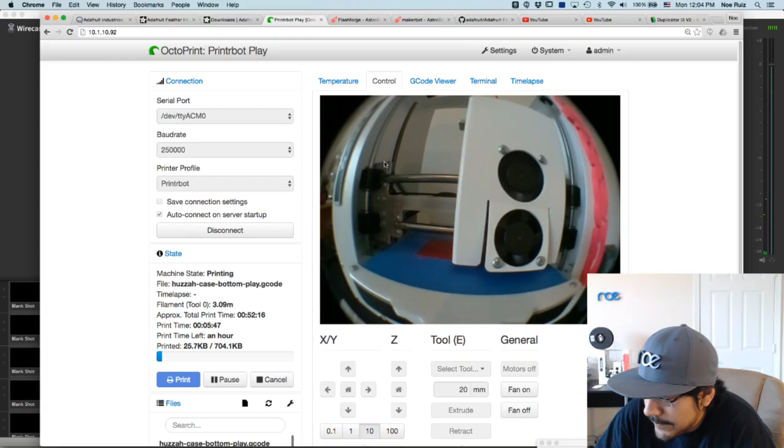Before 123D, we were using Maya to do everything, and when you did a Boolean, you had to make copies of everything before you moved forward, just in case you had to go back and edit something - it didn't have non-destructive editing. Everything we do here is basically a timeline, a list of features you've done - every extrude, every shell, every fillet - you can refer back to it, double click on it, and just change the feature after the fact. You probably could do that in Blender too, but I don't know.

I gave Blender maybe like 30 minutes when I was doing that unicorn horn. I was trying to figure out how to use it, but I didn't get too far with it. But there are tons of resources out on YouTube, and the good thing about it is it's open source and free, and there's tons of tutorials on it. But everybody uses something different, I think.